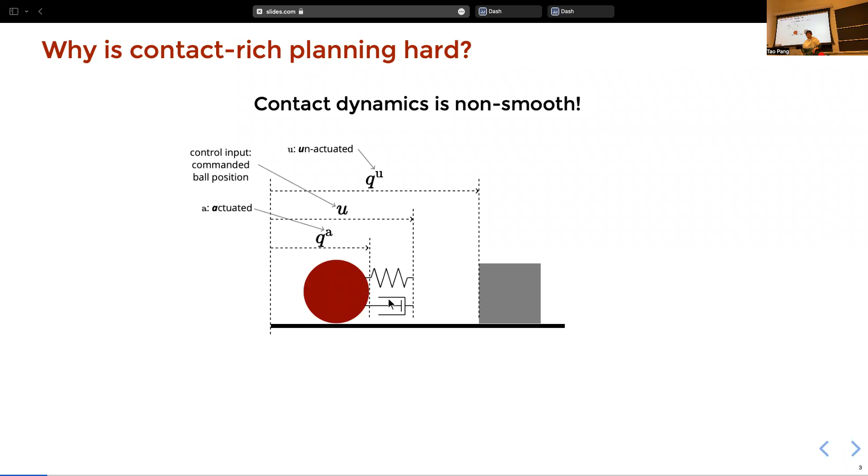So what does the plot of the dynamics look like? Here I have prepared a live hardware demo with a box and a ball. If you're not pushing the box and just moving the ball around, the box would not respond to the commanded position of the ball. The box would only respond when the ball is actually touching the box.

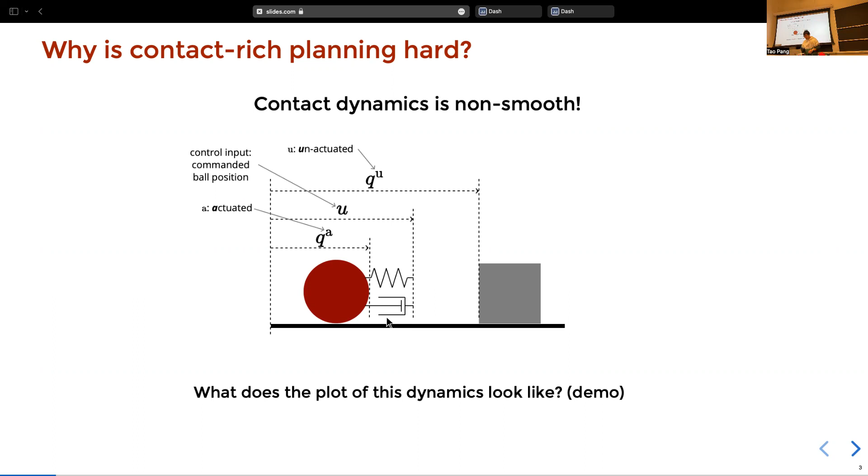Here I have a demo showing that in action. I'm plotting the position of the box against the commanded position of the ball. Before the ball makes contact with the box, it just stands still, and it only moves when contact is established. As we can see, the dynamics itself looks like a ReLU, which has a discontinuous gradient.

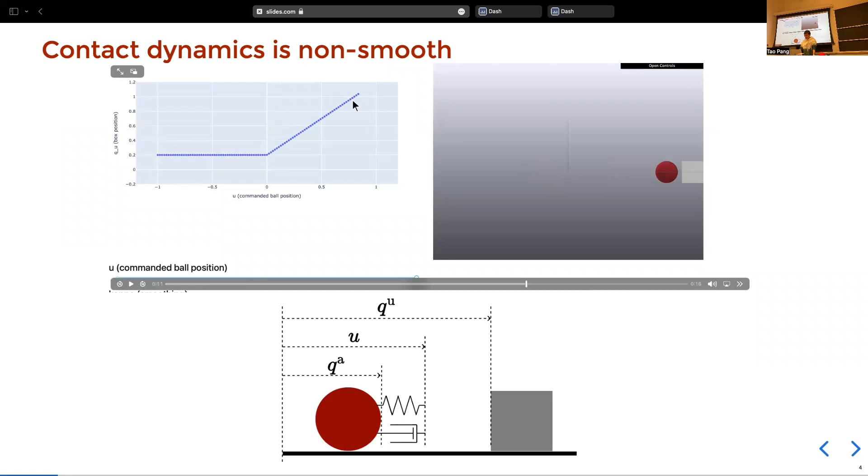And that's going to cause trouble when we try to accomplish certain tasks, such as we want to move the box to the right from where it currently is to q^u goal. We as humans know that we need to push on the box with the ball to move it, but to tell the computer to do it, we need to write it down in a way that it can understand. The most common way to do this is through a framework called optimal control, where we try to minimize the distance between the goal and where the box is after an action is taken.

The most common way to solve this optimization problem is with some local optimization methods, such as gradient descent, where we move in the opposite direction against the gradient of the objective function. So here, if I write down the gradient with the chain rule, you'll see that the derivative of the dynamics comes into play.

And if we use the exact gradient of the exact dynamics in this optimization, we would have a problem, because whenever the ball is not touching the box, which is mostly the case, we would have a gradient that's exactly 0, which tells us nothing about how we should move the ball in order to touch the box.

In fact, this has been a long-standing problem in robot motion planning that people have already come up with a nice solution to. That solution is smoothing. So we can imagine introducing a force field between the ball and the box so that the box can be touched by the ball before they even establish contact.

So this would give us a smoothed version of the originally non-smooth dynamics, which has non-zero gradient when there's no contact. As a result of this positive gradient, if we do gradient descent now, the gradient would indeed tell us to move the ball to the right in order to touch the box, and thereby moving the box to the right as well.

But what if we want to move the box to the left? If we again follow the gradient, it would simply tell us to move the ball to the left. And if the ball starts on the left of the box, it would simply keep moving left, without ever touching it.

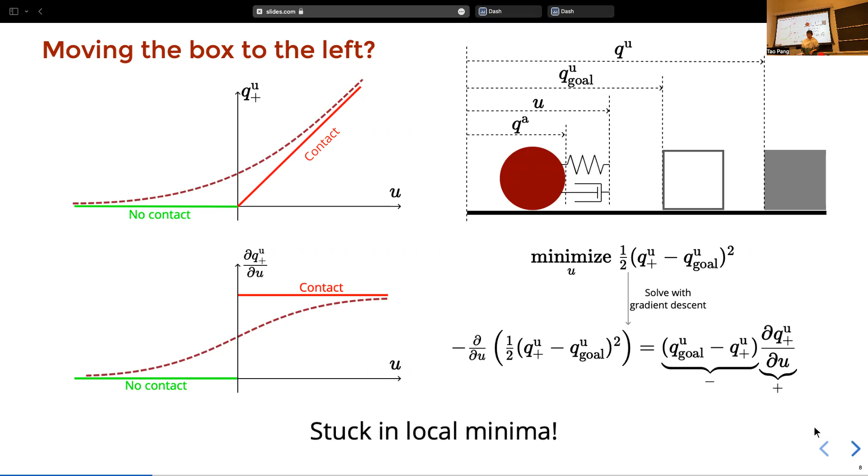That's problematic because it would never touch the box. This is a case where a local search algorithm gets stuck in local minima, which is fairly common in local search methods. We as humans know that we need to move the ball to the right of the box before moving it to the left again to touch it. But for local search methods, that kind of action usually increases the cost before starting to decrease it again, and as a result, it's usually not able to find actions like that.

So we need some mechanism to do a more global search, and usually the way to organize this search is through this thing called contact modes.

For the simple system, there are 4 contact modes: ball on the left not touching, ball on the left touching, ball on the right touching, and ball on the right not touching. The dynamics of the system in each of these modes is relatively simple, in this case linear, so we can just solve the optimal control problem for every one of these modes and pick the solution with the lowest cost.

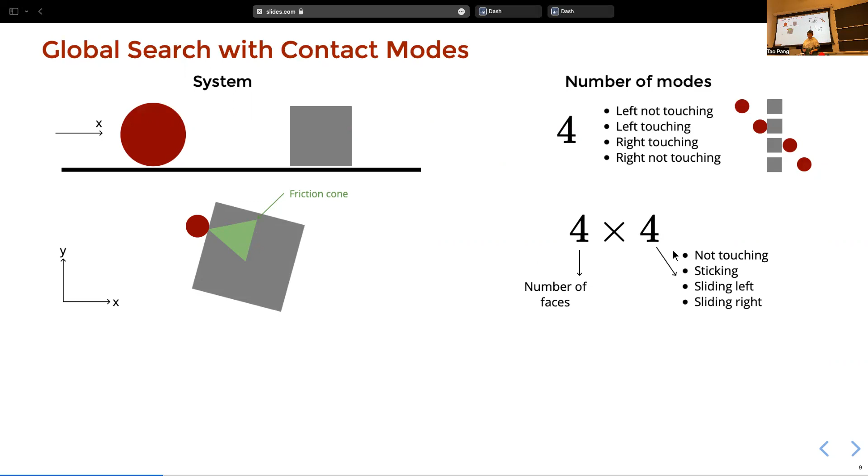But this method has a problem: the number of modes grows very quickly with the number of degrees of freedom or the complexity of the system in general. In this case, if we allow the box to rotate freely and move freely in the 2D plane, and consider friction between the box and the ball, we would have 16 modes. The ball can make contact with each face of the box, and for each face, it can be touching, not touching, sliding left, or sliding right.

And we get to something even more complex, such as dexterous hands, where we have a number that's absolutely astronomical—it's basically hopeless to think through how we would transition from one mode to another. I think this hints that we need a method that's fundamentally different from reasoning about mode transitions.

Okay, hopefully I've convinced you that for contact-rich planning to work on the scale of dexterous hands, we need both global planning and smooth dynamics.

So we will propose a method that takes the best from both worlds, where we combine global planning that is informed by a smooth version of the dynamics, the contact dynamics.

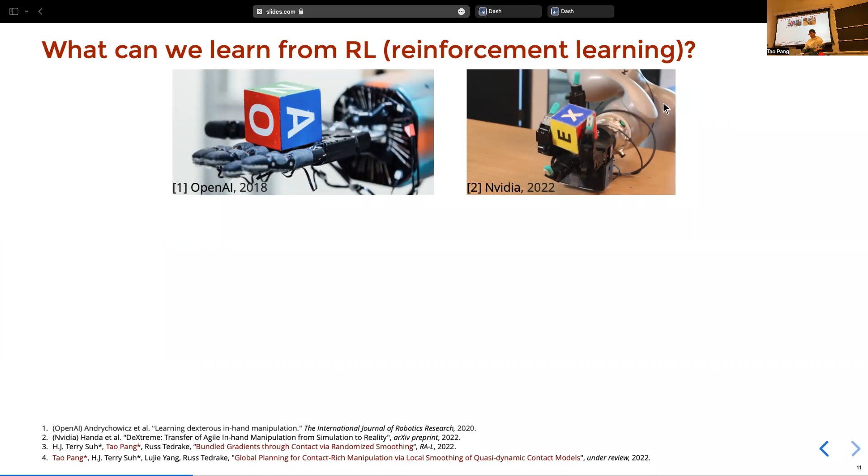A literature review would not be complete without talking about reinforcement learning. I think RL has produced some of the best and most convincing hardware demos with dexterous manipulation, but the way it's done right now leaves a lot to be desired. For example, it requires a heavy amount of offline computation—in the NVIDIA case, it took 60 hours on their beefy machine to get the policy. And after you get this policy, it's very difficult to generalize it to different tasks. For example, the same policy used to rotate the cube cannot really be used to open a door.

Nevertheless, it's undeniable that RL has solved a very difficult problem that model-based methods have been struggling with, and we would really like to understand how it does it. My co-author Terry has thought a lot about this problem. Our hypothesis is that in RL's effort to avoid local minimum, it does a lot of sampling that has a smoothing effect on the dynamics. Therefore, if we could do smoothing without sampling, we may be able to achieve the same level of performance as RL without incurring the computational cost of RL.

Before talking more about the technical details of our planner, let me show you what it can do. All these plans are generated by our planner. This is showing a visualization of the plan using the quasi-static dynamics, which I have yet to introduce.

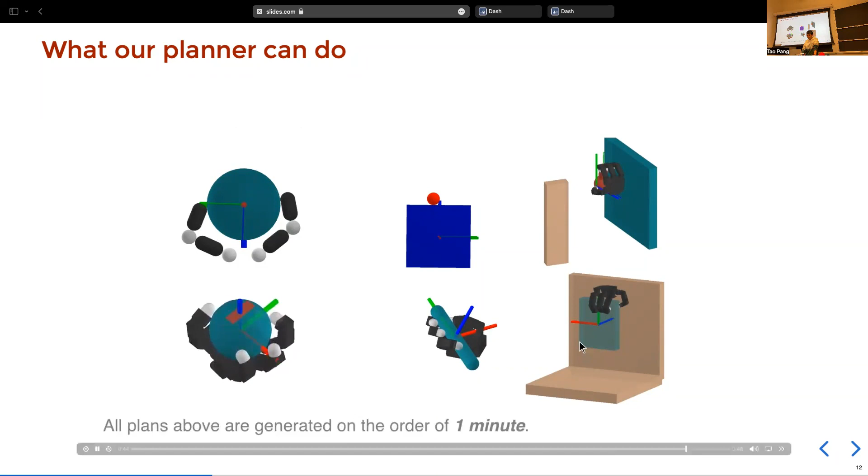This is box pushing, and this is something more complex. We have a dexterous hand opening a door, a dexterous hand picking up a book, a dexterous hand trying to align a pen with the target frame, and finally a dexterous hand rotating a box in hand. A ball in hand. Okay, it's going to take a while. One thing to note here is that there's a lot of repositioning of the fingers to get a better grasp on the object in order to keep rotating it.

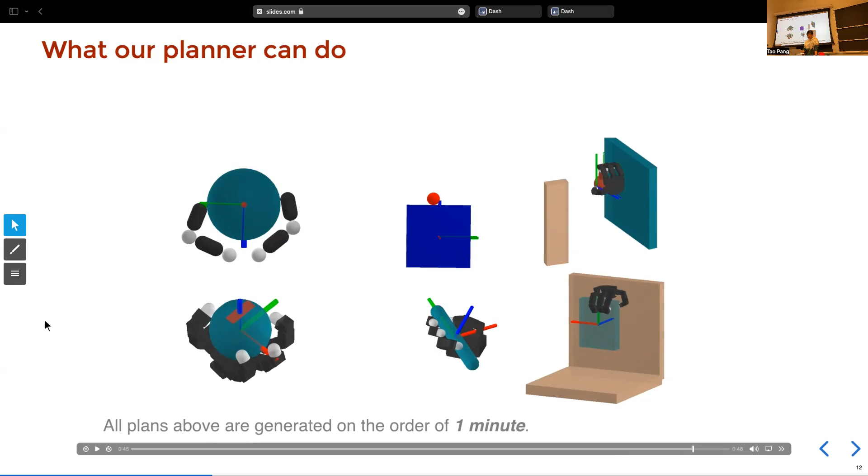All of these plans are generated on a laptop with about 1 minute of online compute. Here we are showing that the plans generated are indeed contact rich. The colors indicate the contact forces between the hand and the object, and as you can see, a lot of the different parts of the hand are activated during the execution of the plan.

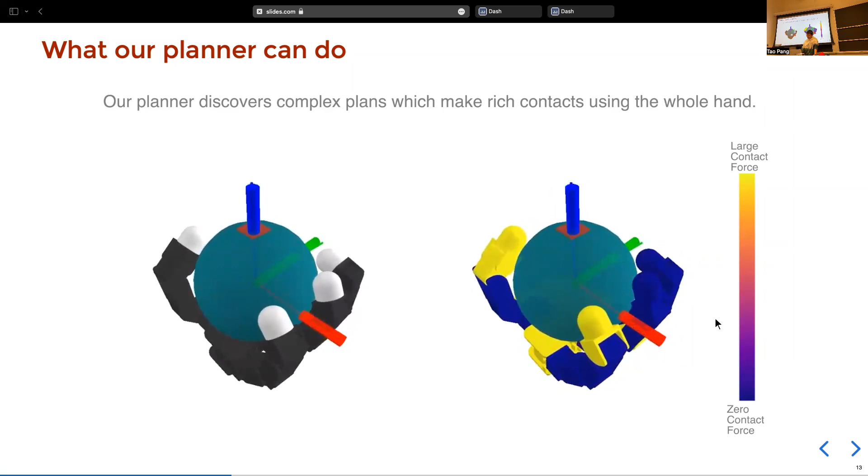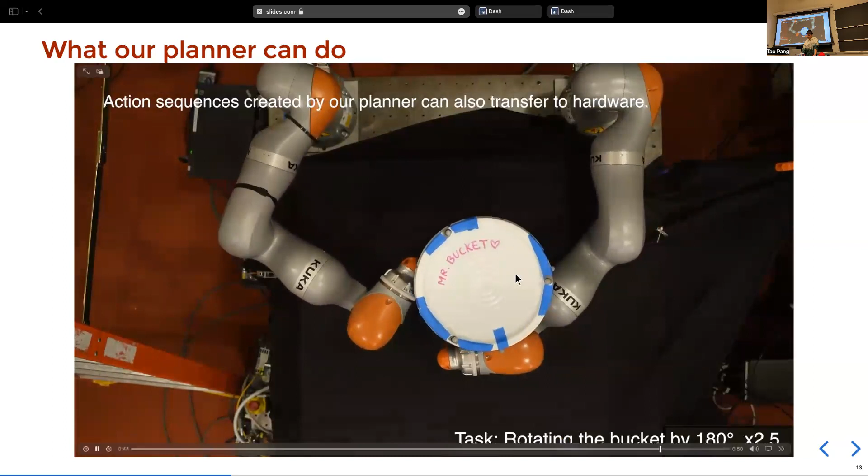This also works on hardware as well. Here we are trying to rotate the bucket by 180 degrees. Here's the action that we are particularly fond of, where the bucket starts off on the hand of the arm and rolls onto a hook that's formed by the arm. It's showing that the bucket is indeed rotated by 180 degrees.

Summary of our contributions: we proposed a contact-rich planner that can generate plans for complex systems involving dexterous hands, and on hardware, with just about 1 minute of online compute on a laptop. In contrast, RL-based methods need tens of hours of offline compute on a beefy workstation to get a functional policy. Our planner is enabled by a novel contact dynamics model which is quasi-static, convex, differentiable, and amenable to smoothing, which we have argued is essential to the success of contact-rich planning. With the help of this model, we proposed a sampling-based global search algorithm that's guided by this model.

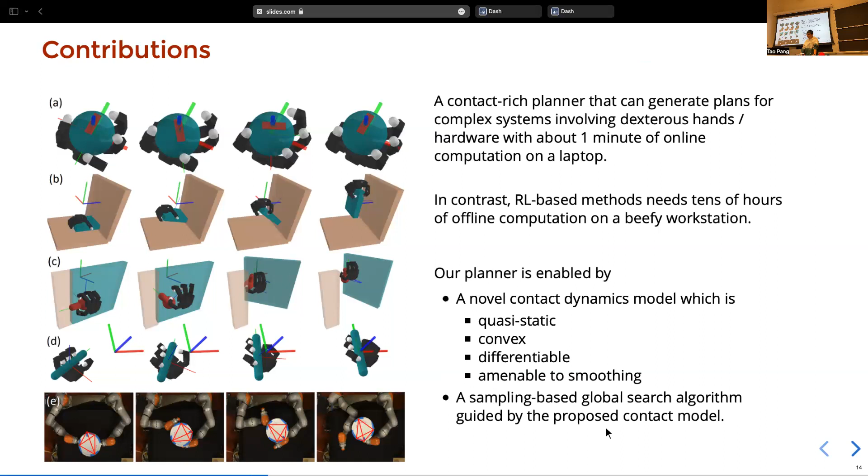First off, I'll talk a little bit about how the contact model works. There will be some equations in this section. I'll get over it very soon.

So first off, what do we mean by the dynamics being quasi-static? By dynamics, we mean a discrete time version of the dynamics that tells you where the object is at the next time step from the current object configuration and the action. By the system being quasi-static, we mean the velocity is so small that the inertial forces and Coriolis forces can be ignored during the entire process. As a result, velocity is not part of the state - we only have configuration, hence Q instead of X in the dynamics.

As I showed in the simple ball and box example, we divide the system configuration into an actuated part corresponding to the robot and an unactuated part corresponding to the objects. We use U again to denote the commanded position of the robot, which is usually impedance controlled with some stiffness - damping disappears here because everything is quasi-static. We also use delta Q from time to time to denote the difference between the next configuration and the current configuration, and we'll use H to denote the step size. So it may come up from time to time as well.

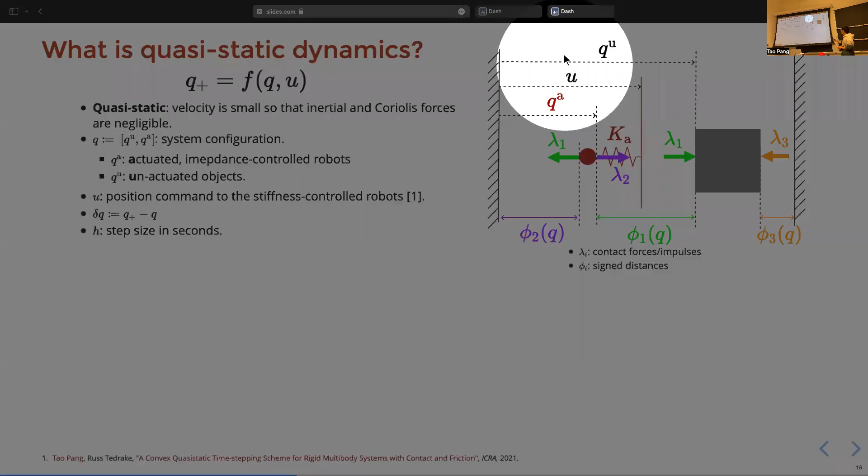To model contact, we need contact forces, denoted by lambdas, and distances between different contact pairs, denoted by phis. Here we have three contact pairs: one between the object and the robot, one between the robot and the wall, and one between the object and the wall.

These variables need to satisfy the constraints of physics. The robot needs to stay in force balance, and so does the object. And there cannot be any penetration between any of the objects and the walls. So for any contact pair indexed by i, there cannot be any penetration.

Contact forces can only push on objects, they cannot pull objects towards you. And last but not least, you can only push on objects when you're in contact. This is a classic set of constraints to model contacts.

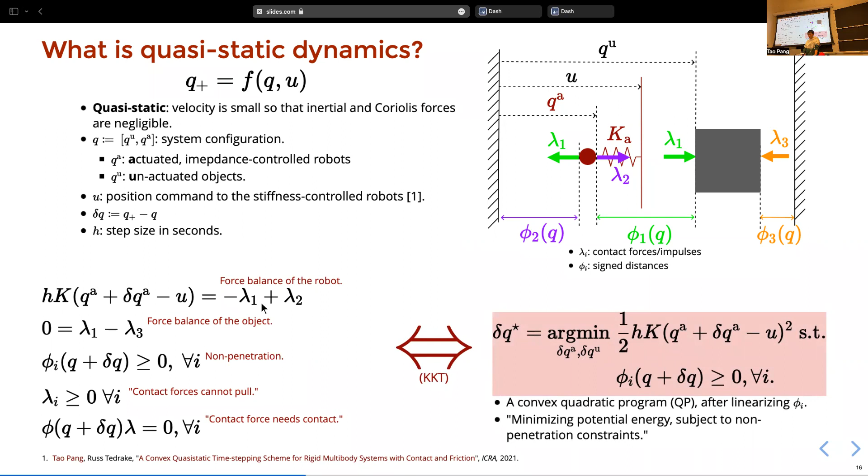It turns out that this set of constraints is equivalent to the optimality condition of a quadratic program. So if you solve this to optimality, it's equivalent to satisfying this set of constraints. After solving, you simply add the solution to the current configuration to get the next configuration.

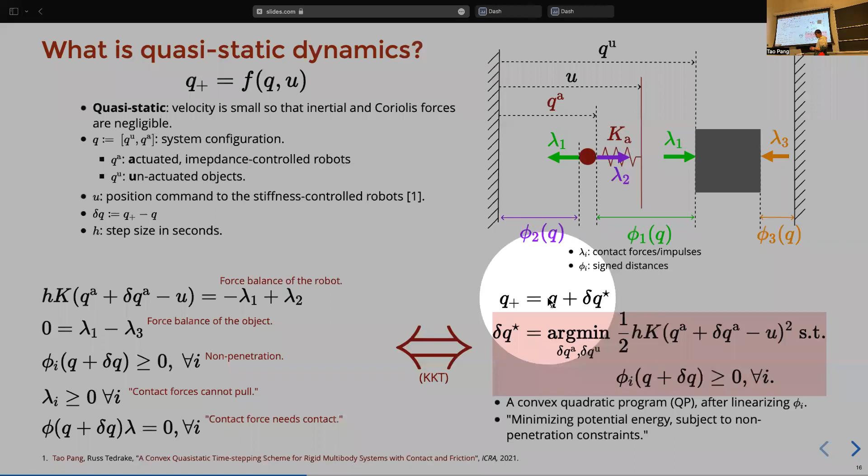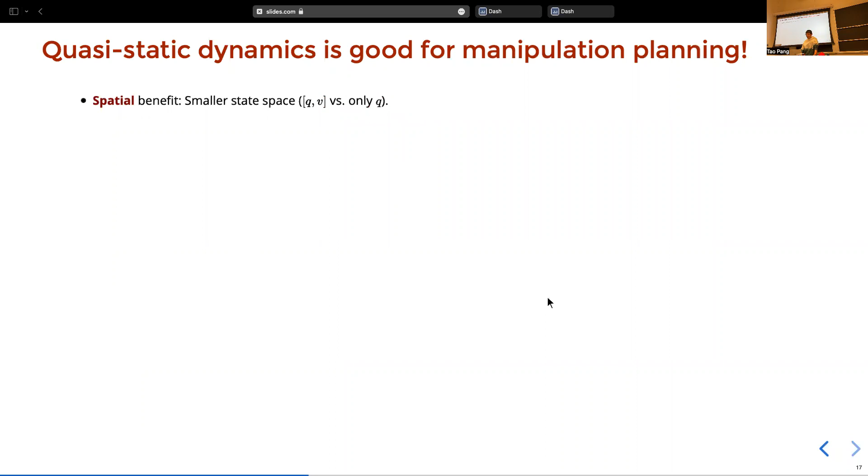So why do we care about quasi-static dynamics? First off, we only need to deal with a state space that's half as large as a second order system, because we throw away V and only deal with Q.

But an often overlooked benefit of quasi-static dynamics is on the temporal side of things, where by ignoring the transients introduced by spring dampers, we can look ahead a lot further by taking fewer steps.

Here I'm showing this extremely simple second order system with mass, spring, and damper. If you were to model second order dynamics, you would have to take many steps before reaching the equilibrium. But with the quasi-static version of the dynamics, you reach the equilibrium in one step.

Usually this can save you some amount of compute when formulating the planning problem. Also, many manipulation tasks are indeed quasi-static. They are dominated by friction and contact forces instead of the Coriolis forces and inertia forces.

This is a very good example of what a quasi-static system is. Whenever I push something, it moves, and when I'm not pushing it, it doesn't move. That's the operational definition of what quasi-static can mean.

But the formulation we just brought up on the previous slide needs a little bit more thought. Here you can see that the objective function is only positive semi-definite, because there is no cost on the delta Q U terms.

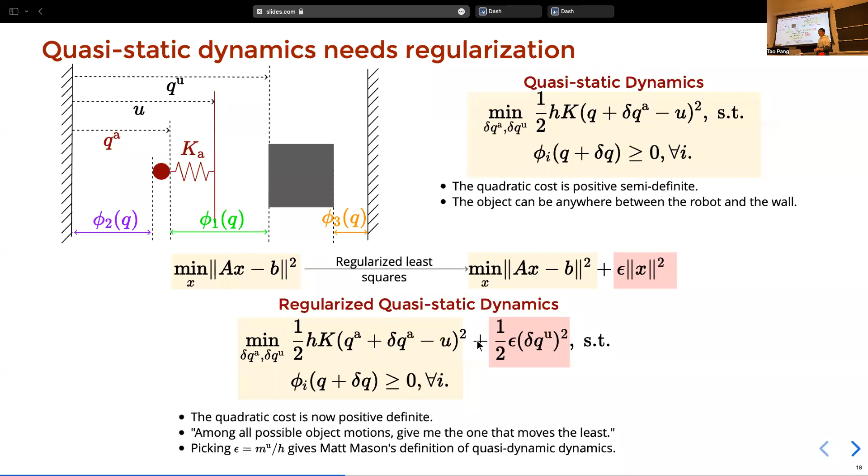If we pick this regularization constant equal to the mass divided by the step size, this gives you Matt Mason's classical definition of quasi-dynamic systems. But in general, we can pick the regularization in a way that reflects how heavy or how much resistance the robot faces when pushing the object.

So far we've been talking about simple systems, and we've shown that they can be formulated as a convex program. But for more general frictionless systems with many contacts and many states, the dynamics is still a convex program, although it looks a little bit bigger.

You don't have to worry about the details of the terms in the equation. I just want to show the quadratic form that appears in the objective, and the linear constraints that are in the cost.

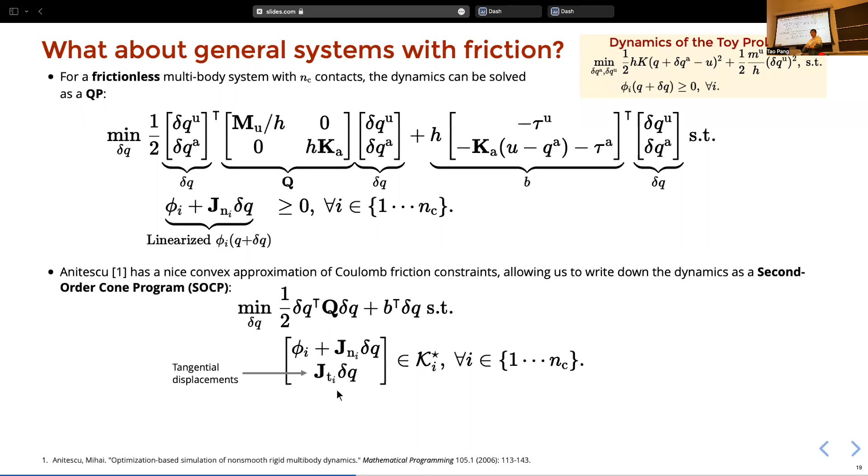If we want to model friction, it turns out that Anitescu has proposed a nice relaxation, or convex approximation, of the Coulomb friction constraints, so that instead of inequality constraints, you have cone constraints that are still convex. This allows you to solve for general systems with contact and friction.

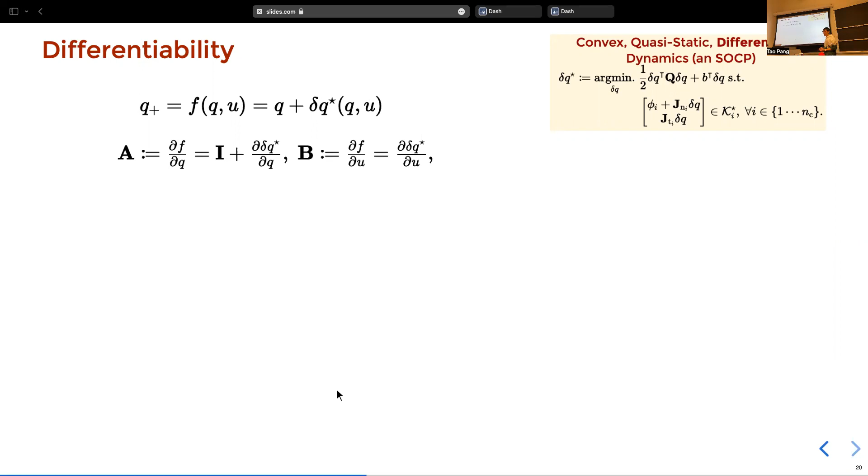Okay, since the problem itself is convex, we can make use of existing techniques that differentiate through convex programs to get the gradient of the next system configuration with respect to the current configuration and the action. The standard way to do it is by applying the implicit function theorem to the active constraints at optimality. And many differentiable simulators indeed take this approach.

The thing to note here is that what you get from this differentiation is the gradient of the non-smooth dynamics. Remember the ReLU that I showed earlier? If you do this, it would give you either 0 or 1. But with the gradient computed from differentiable simulators, we can smooth them using first-order randomized smoothing.

But randomized smoothing requires sampling. And for systems with contact, there is a more efficient way to do the smoothing, which we call analytic smoothing.

We have shown that for this system, this is the same system with 3 contacts. We can formulate the dynamics as a QP here, which is equivalent to a set of KKT conditions that describes the physics of the system.

And it turns out that we can also do an unconstrained version of the same QP, where we shovel the constraints into the cost with an indicator function that is 0 when the constraints are satisfied and goes up to infinity when the constraints are violated.

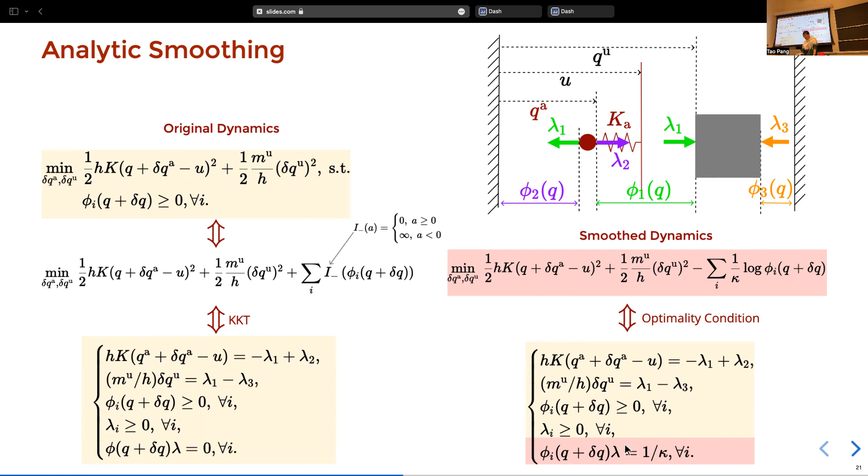For general systems, the thought process is still the same. The only difference is that instead of having a log for the inequality constraints, we now have a generalized log for the cones. The resulting optimization program just looks longer, but it's still the same: it's unconstrained, it's convex, it can be solved with interior point methods, it is differentiable, and it will provide us with smoothed gradients, which we can use to do contact-rich planning.

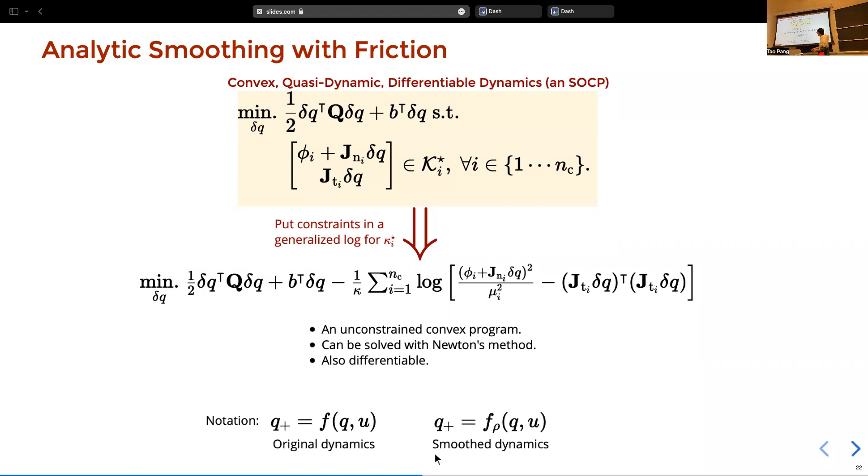From here onwards, I'll use the subscript rho to denote the dynamics that's smoothed. Now we are ready to move on to talk about global sampling-based contact-rich planning using this quasi-dynamic model.

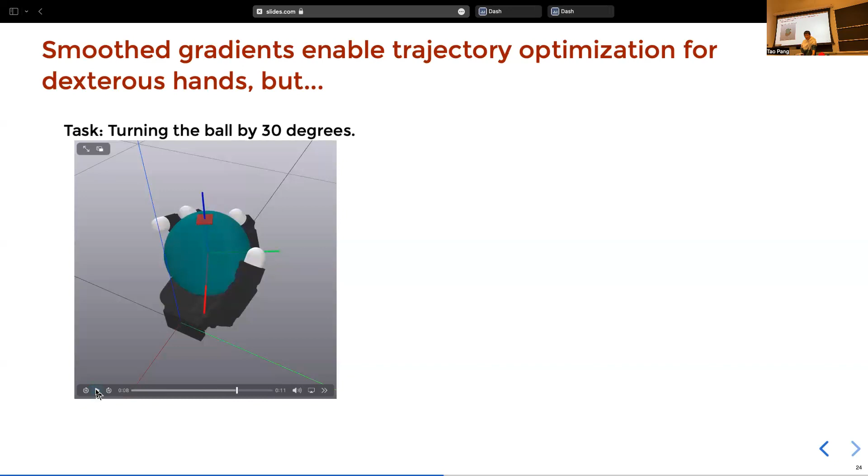As I mentioned earlier, local search methods can give pretty good results when there's no local minima to avoid. In this case, we can rotate the ball with the hand by 30 degrees just fine, using just gradient descent with the gradient computed from the quasi-dynamic dynamics. But what if we want to rotate it by 180 degrees?

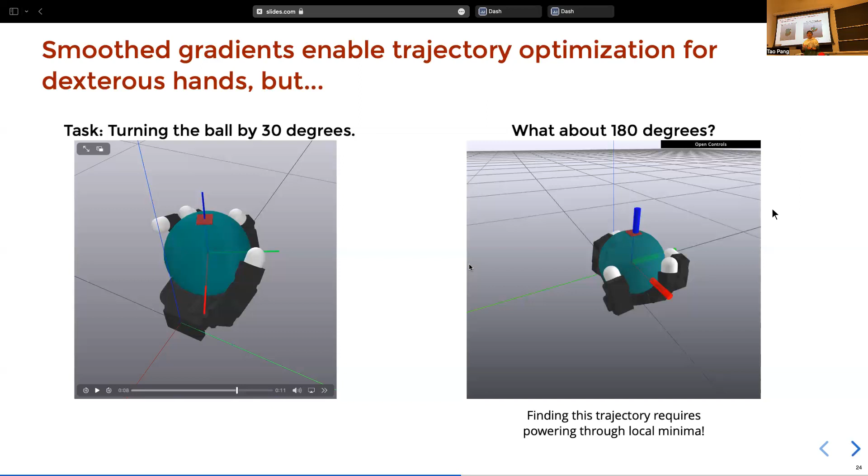You can see that in this process, the hand reconfigures itself to get better grasps on the object from time to time in order to keep rotating the ball. And this kind of reconfiguration usually incurs some cost on the control action. That means cost will go up before it can start to go down again. And this is very adversarial for local search methods that always try to go downhill on the cost.

As a result of that, we need something that looks more globally for a solution, and sampling-based motion planning has been known to be very good at this global exploration.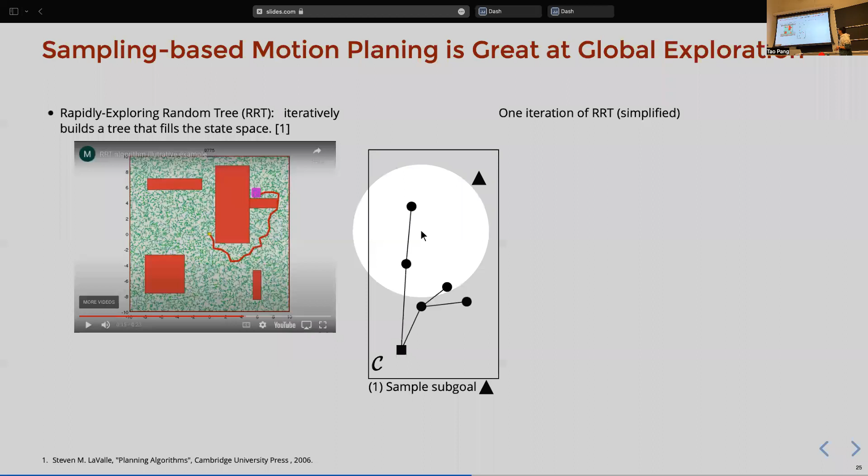At a typical iteration, we would sample a subgoal from the configuration space, then compute the distance from every node in the tree to the subgoal, and pick the one closest to grow the tree from. Since the subgoal itself is collision-free, we can simply add it to the tree. But there is a problem when there are dynamics constraints on the system.

In this simple example of the car, it's very easy for the car to move forward, but almost impossible to move it sideways. So although these two configurations are the same distance to where the car currently is according to the global Euclidean metric, their dynamic reachability implies that their actual distance needs to be vastly different.

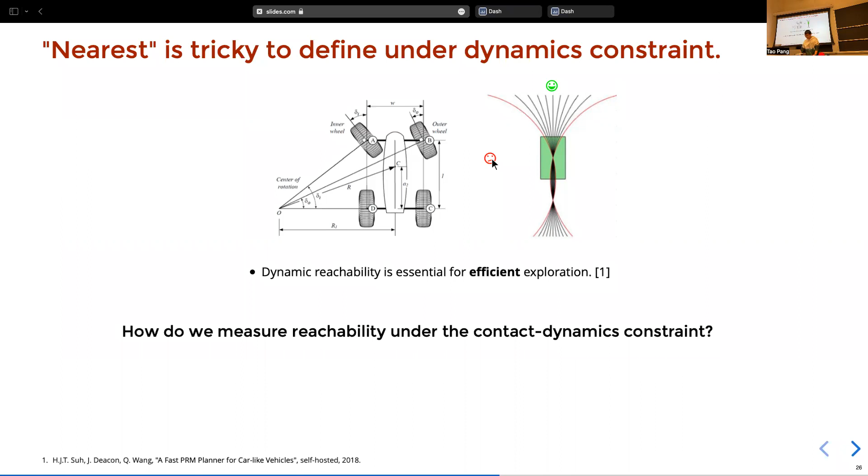Therefore, we need to answer the question: how do we measure dynamic reachability under the contact dynamics constraint? Our solution is a distance metric based on the smooth linearization of the contact dynamics, the quasi-static contact dynamics. Recall that we've shown we can smooth the contact dynamics, and this subscript rho denotes that the thing has been smoothed.

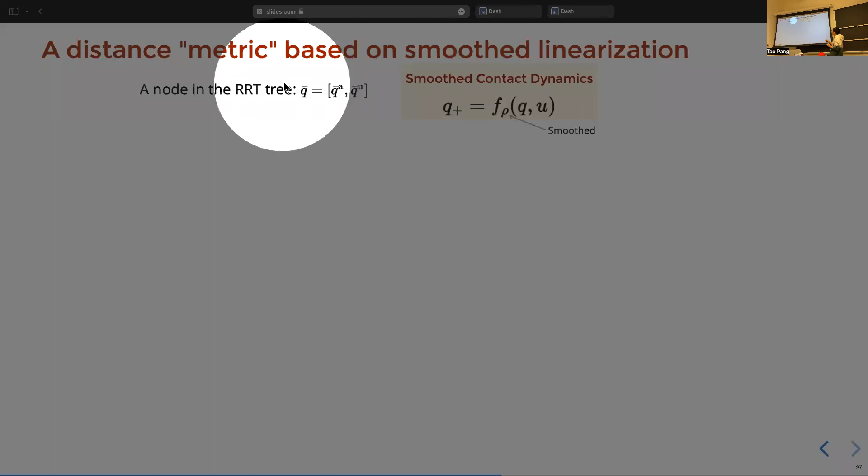Our goal is to compute a distance metric for a node that's currently in the tree, denoted by the bar. We use what we call a smooth input linearization, which tells us where the system can get to with a small perturbation from the nominal robot configuration. Since we're mostly concerned with moving the object from one configuration to another, we can just take the rows of the first equation corresponding to the object.

Then we can define our distance metric, which looks like an ellipsoid, where the shape of the ellipsoid is defined by B B transpose, and the center is defined by just the evaluation of the function value from the nominal configuration.

The epsilon sub-level set of this distance metric is indeed an ellipsoid. A different way to look at this is that we take a unit ball in the action space and transform it through the B matrix into the space of object configuration. There are certain directions in which the ball is elongated - those are directions that are easy to reach. And certain directions which are contracted - those are directions that are harder to reach.

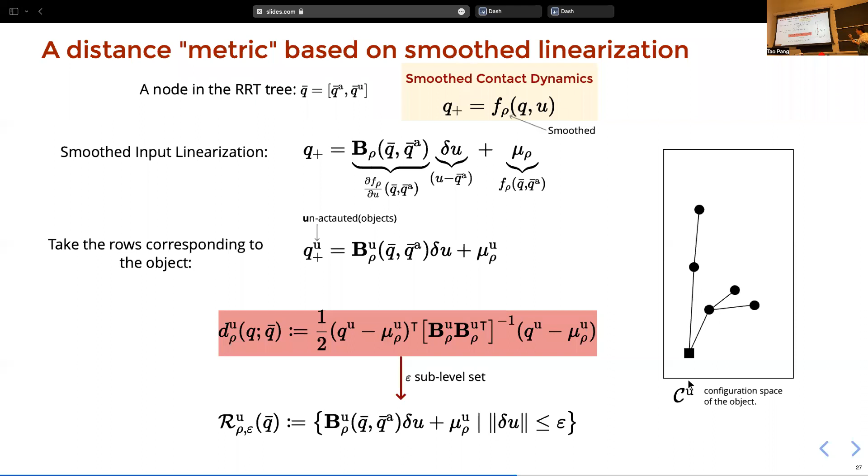We also propose a slightly different way to visualize the new tree where each node has a distance metric. Now, instead of drawing the box as the entire configuration space, we only draw the box as the configuration space of the objects. For every node, because there's also the configuration of the robot, we can compute the distance metric for each individual node.

Now I'm ready to show what it looks like. Let me first explain what's on the screen. On the right is the visualization of the ball and planar hand system, and on the left is the tree in the object configuration space that I just described. The horizontal axis is the translational degrees of freedom of the ball, and the vertical axis is the rotational degrees of freedom of the ball.

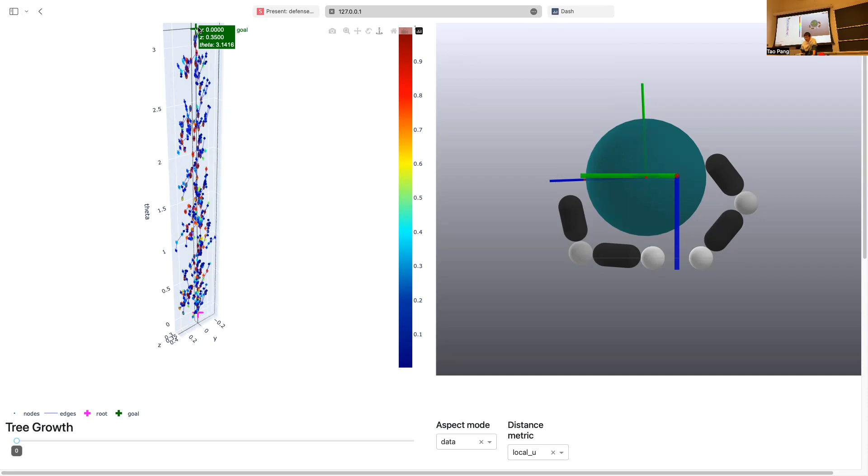The goal here is to rotate the ball by 180 degrees, so as you can see, the root starts at angle equals 0, and the goal is up here with theta equals pi. I can hover on these nodes, which will draw the configuration of the system on the right.

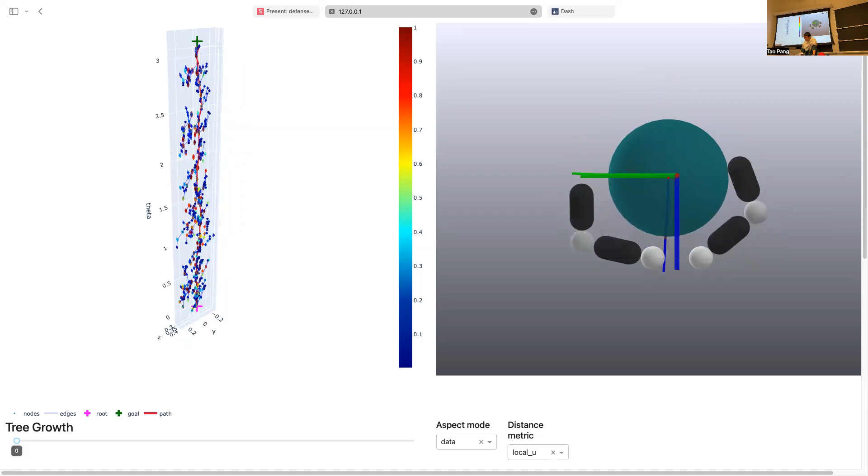Let me first show you what a path looks like. I can show a path to any of the nodes by just clicking on it. Let me replay it. Yeah, that looks pretty convincing.

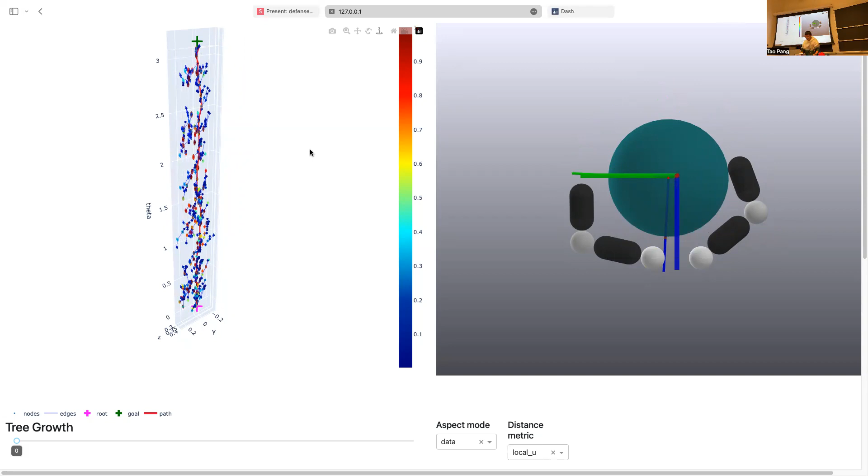This kind of tree is what you want when you're a motion planner trying to grow a tree that fills up the configuration space - it uniformly explores all directions and fills it up nicely. If we zoom in, we'll see that each node has its own ellipsoid, which is its distance metric. The color of the ellipsoids denotes their volume - a redder one means it has a larger volume, and a blue one means it has a smaller volume.

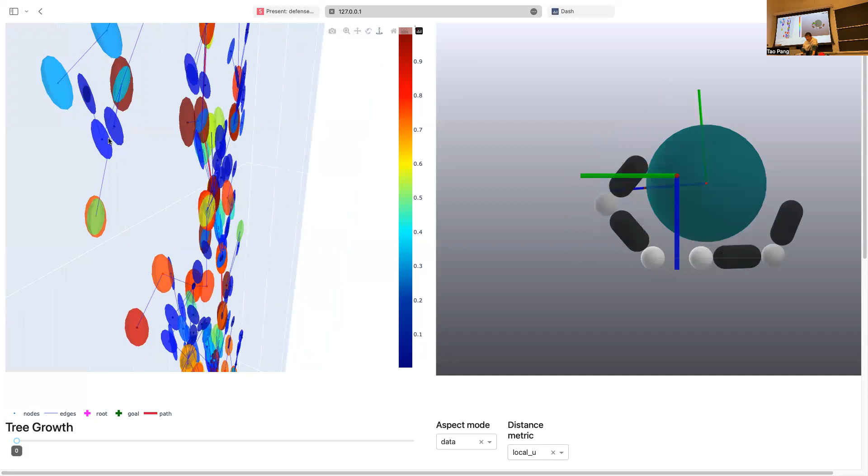If we rotate around, we can see that these blue ones are almost flat in certain directions, which means they will be considered as far away from almost any other configuration. If we look at what these configurations with bad distance metric look like, they usually correspond to configurations where the robot is not really touching the object. In contrast, where the distance metric is good, is red, we almost see a good grasp with the robot on the object. These blue ones usually do not correspond to configurations with contact.

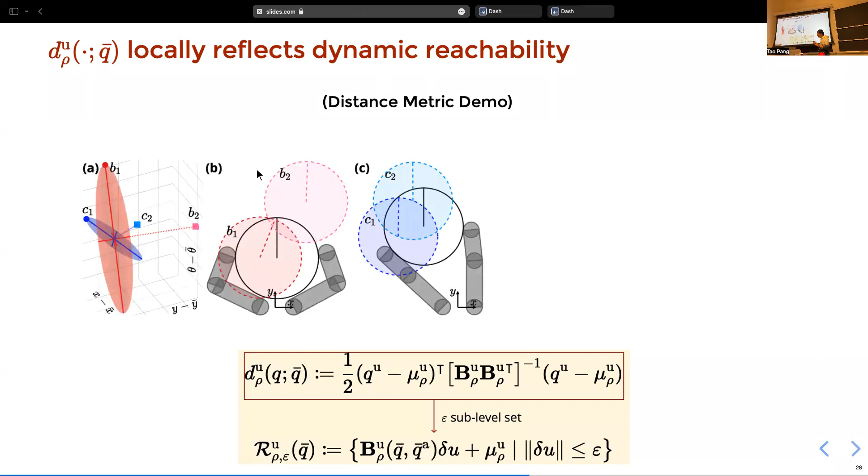Just to reiterate what I showed in the demo with nicer graphics: for this configuration, the nominal configuration is shown in black, and the distance metric is shown here as the red ellipsoid. B1 and B2 are two configurations that are equidistant to the nominal configuration according to the global Euclidean metric, but B1 is apparently a lot closer than B2 according to the local metric. As shown here, it is intuitively clear that it's a lot easier to move the ball to the red configuration than to the pink configuration.

Another thing I mentioned is that usually good distance metrics correspond to configurations with contact. Here, as I move the robot further and further away, you can see that the distance metric shrinks from a large, nice ellipsoid to something that's almost invisible. So there's a little bit of blue in the center, corresponding to the blue configuration of the robot.

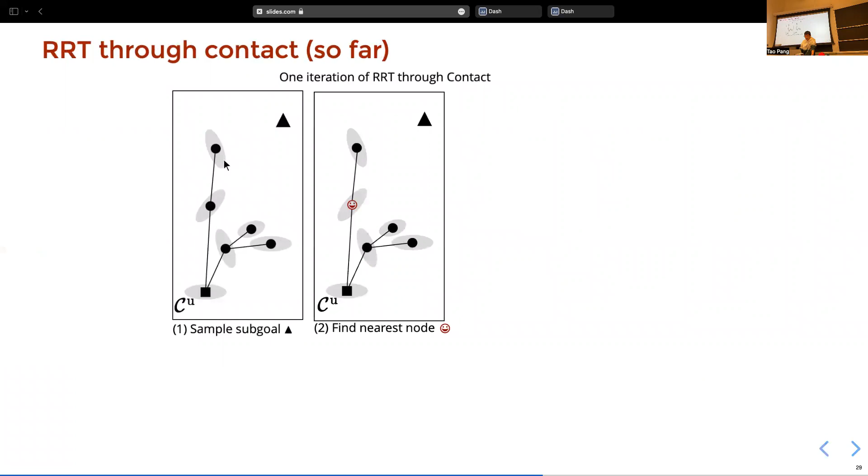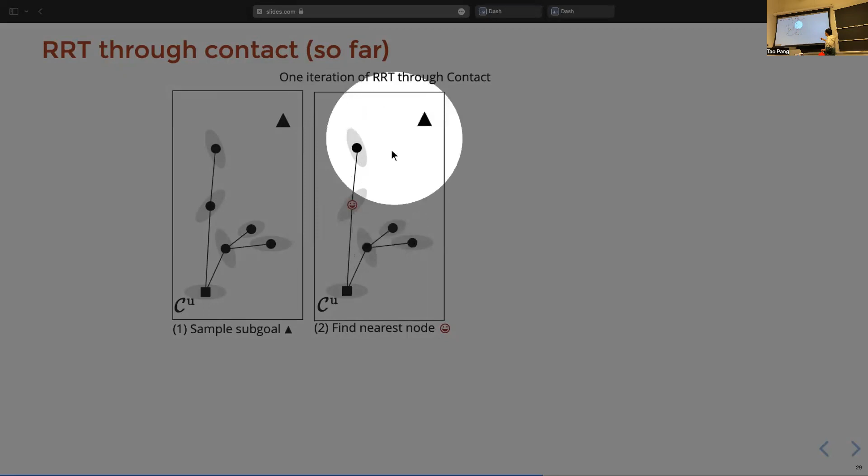So far we have shown that with the help of the distance metric, we can better tell the distance from the subgoal to the tree. If we were to use the global metric, this would be the closest node, but because we have individual metrics for individual nodes, this is now closest to the subgoal. After picking the closest nodes from the tree, we will compute a small action that takes us a bit closer towards the subgoal.

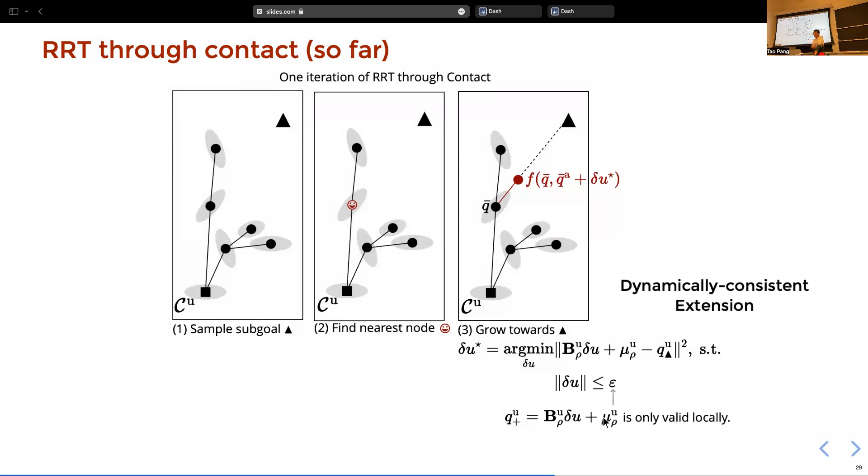We compute this action by solving a small optimal control problem that uses the smooth linearization of the dynamics, and here we only take small steps because we know that the smooth linearization is only valid locally. We call this dynamically consistent extension, which means the rollout here is consistent with the non-smooth version of the dynamics.

But there's a catch here. If we were to do this, we would only be making small changes to the robot configuration. As I said on the bottom, this is against the very spirit of RRT, which requires us to sample uniformly in the configuration space of both the object and the robot.

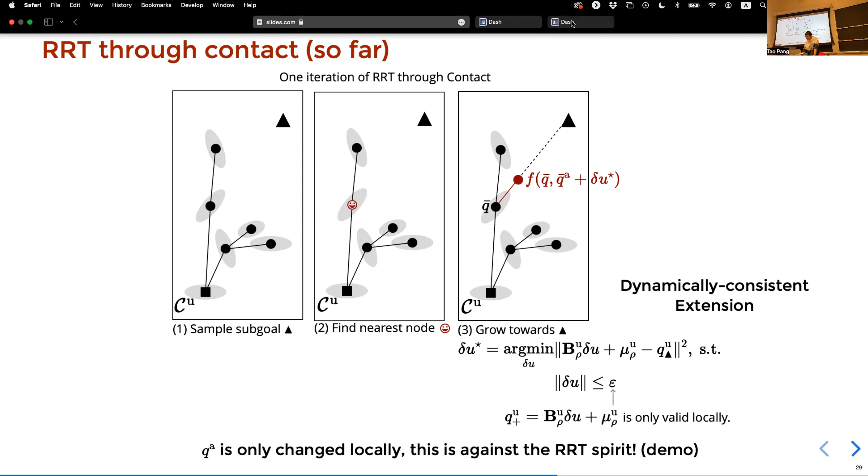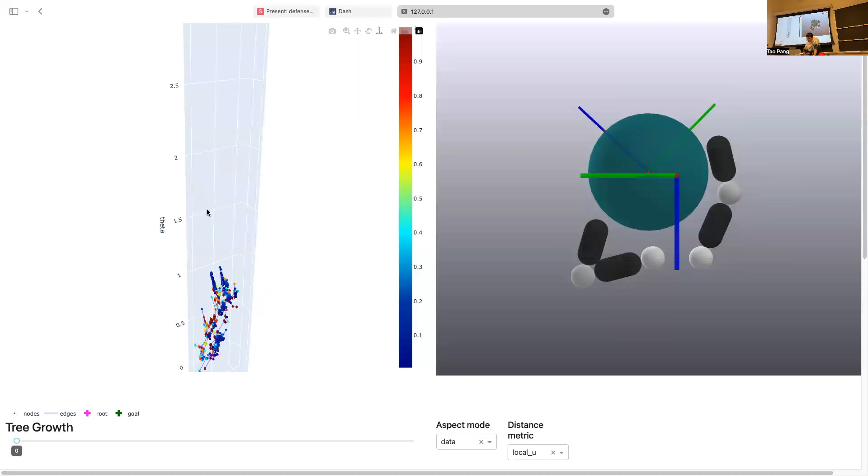The consequence of doing only this: I have a different tree. This tree has the same number of nodes as the one here, but you can see that it tries, yet it falls short of reaching the goal by a wide margin.

If we were to look at this tree, I'm going to hover on it and slide over the tree for you to see what it looks like. The robot configuration changes by a small amount from node to node. This is the exact reason why it's stuck, because we are not looking at the different ways in which robots can be interacting with the object.

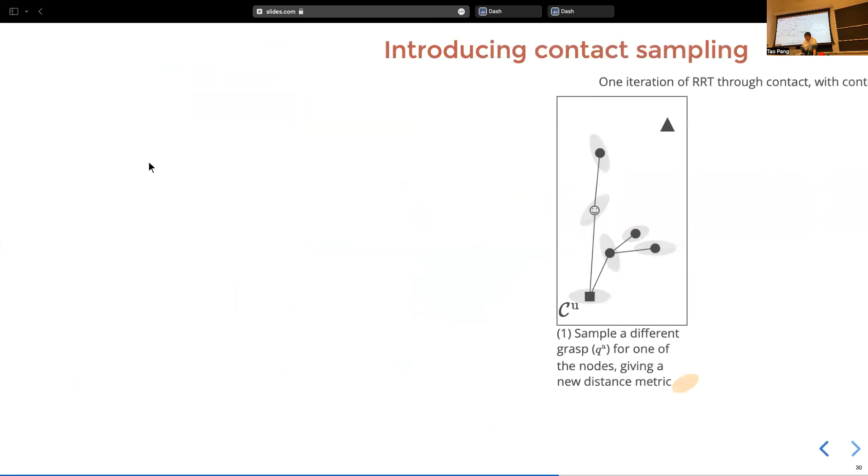To solve that problem, we introduce a new trick called contact sampling, where instead of trying to connect to the subgoal at every iteration, we pick one of the nodes from the tree and try to find a different way for the robot to grasp the object. That will give us, for this node that we picked, a new distance metric. So now with the new distance metric, this is the closest node to the subgoal, and we can make the connection from there.

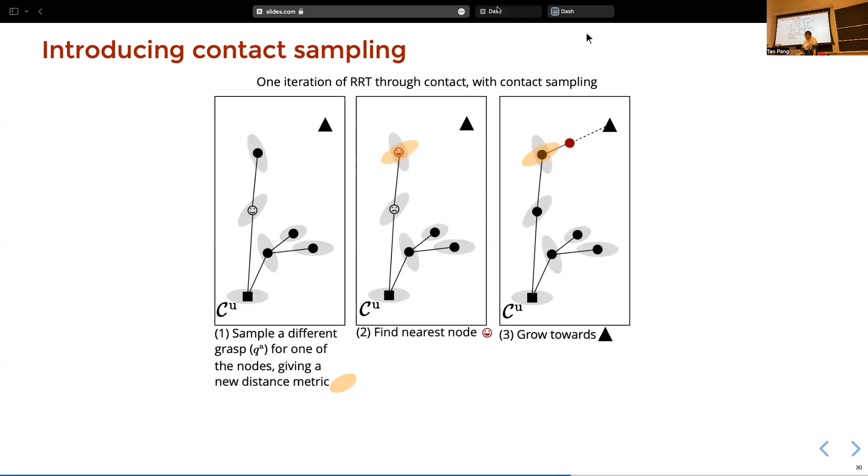You might have noticed that in the demo I showed earlier, there are nodes, object configurations, with multiple ellipsoids. This is exactly what happens when you do contact sampling. I can hover my mouse: for this object configuration, this ellipsoid corresponds to one way to grasp it, and this is another way to grasp it. The same is true for many of the other nodes.

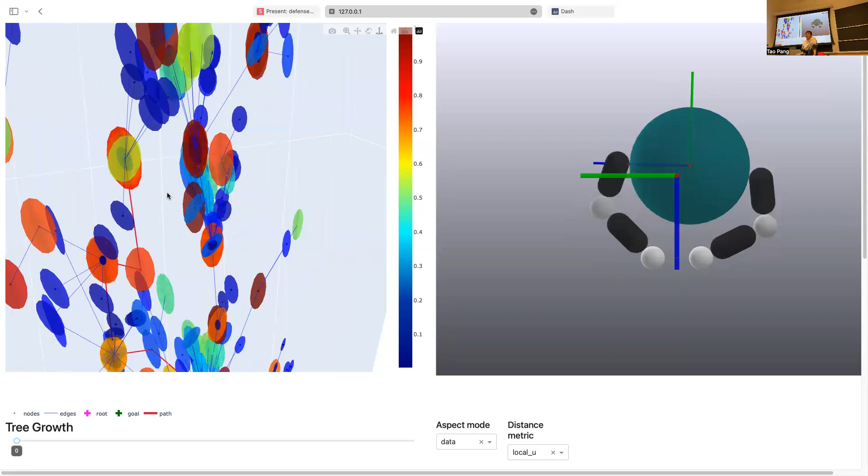A quick question on that example: what's the difference between one configuration where the 4 links are in contact versus the other one where only 2 links are in contact? Or was it more subtle than that?

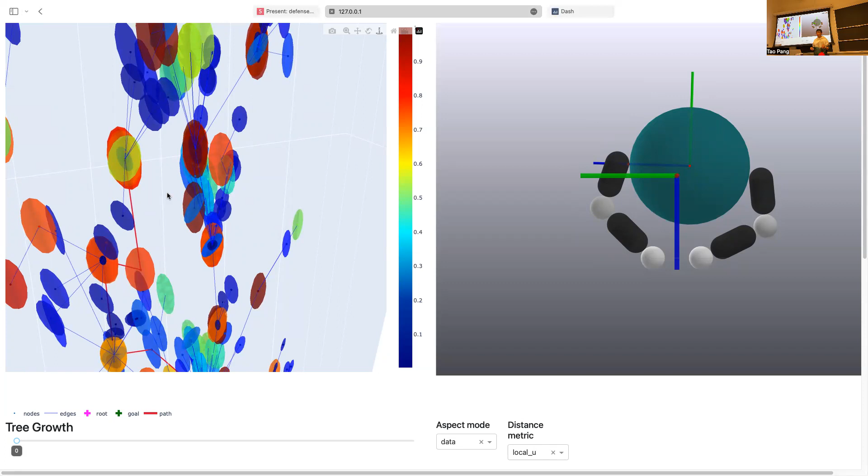No, it's not more subtle than that. We just have 2 ways to sample contacts: one is for the robot to hug the object, and the other is to grasp it with the end effector.

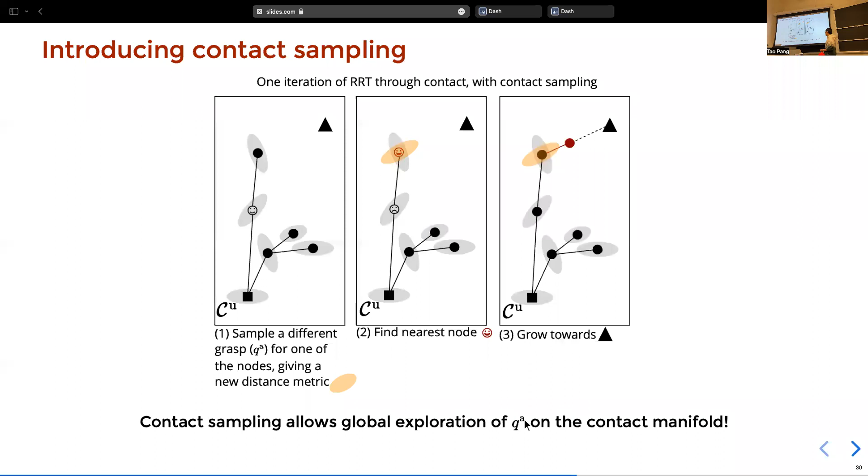Okay, with this trick we are now able to explore globally the configuration space of both the robot and the object.

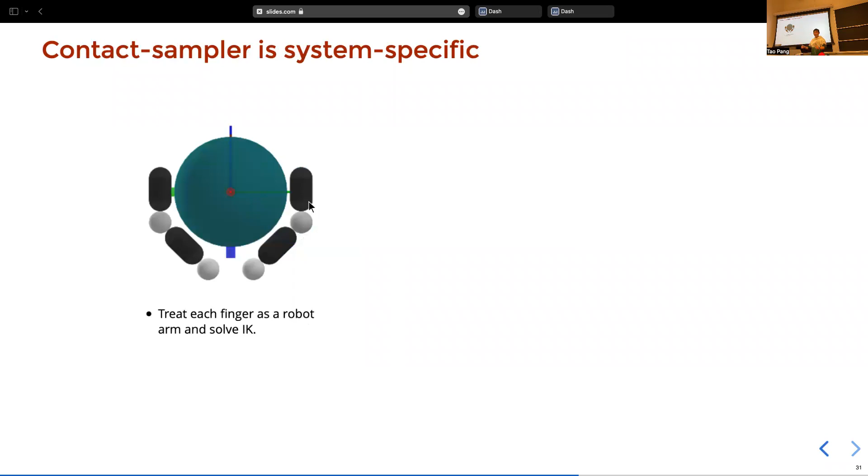Just a quick note on how we implemented the contact sampler. It is system specific. As I said in my answer to Alberto's question, for the planar hand system, we can either solve IK for individual hands or fingers, or try to hug the object. For the dexterous hand, what we did was sample a random direction in the configuration space of the hand, and then try to close the hand until it touches the object. This can be improved vastly with better techniques, but the important thing is that we need contact sampling to achieve good exploration.

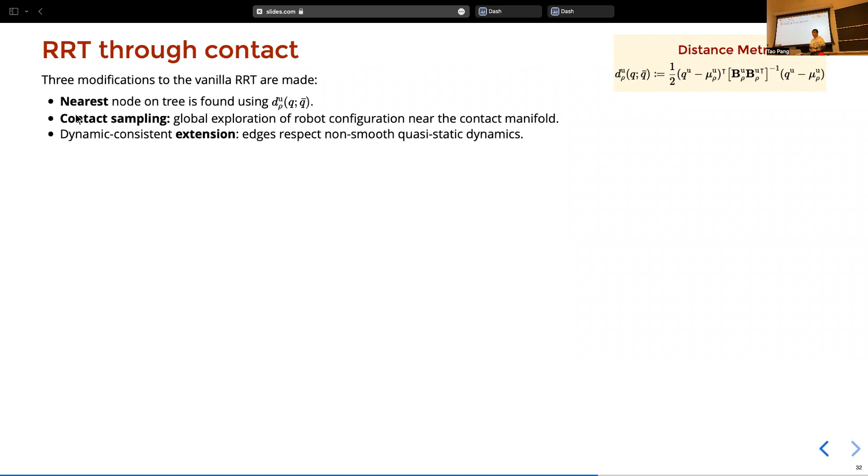Here's a summary of the modifications to RRT that we proposed to make contact-rich planning work. First is a distance metric that tells you the nearest node according to reachability. Second is contact sampling, which allows global exploration of the configuration space of both the object and the robot. And the last is dynamic consistent extension, which makes sure that the path we get from RRT satisfies the quasi-static dynamics.

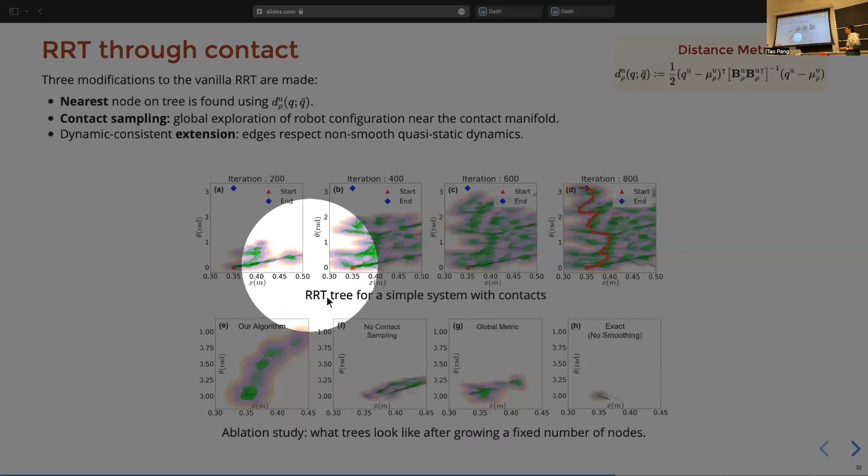Here's just a reiteration of what I showed with the demo, with a system I can plot on the plane. In the first row is what you get with an RRT that has all three modifications. As you can see, we can grow a tree that fills up the space nicely and finds a path to the goal. The second row is an ablation study where we remove one of these components and compare the shape of the tree. As you can see, without any of these, we get a tree that's stuck locally close to where it started.

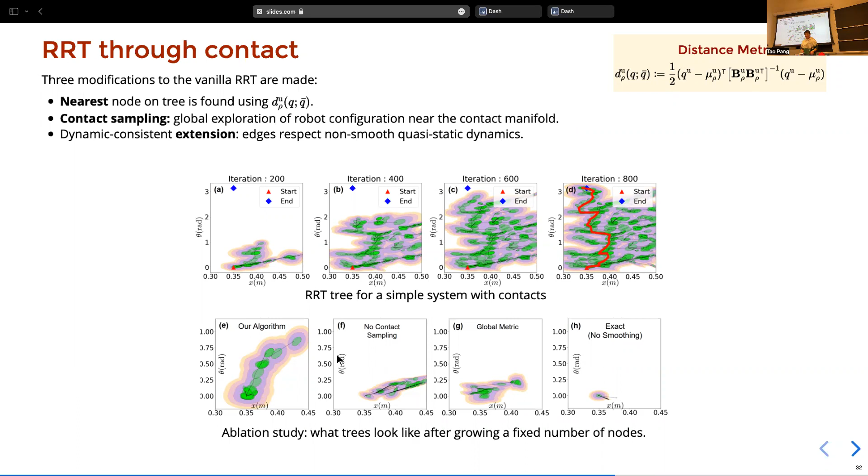All right, so next I'll talk about how these actually transfer to— oh sure, sure.

Have you seen anything where you might have a large radius of something that could have a large delta based on where you're going, that would maybe trick this into doing something a little more chaotic? Does that make sense? Wait, by having a large radius, you mean the node is considered close to every other node? If you have an ellipsoid with an extremely large radius, then every other node will try to connect to it. I haven't really seen that, but if that is indeed the case, then the planning problem should be relatively simple. So, just trying to think...

We've shown that we can do planning pretty nicely with this quasi-static dynamics, but how well does it transfer to a more realistic second-order simulator or even hardware? The answer is mixed.

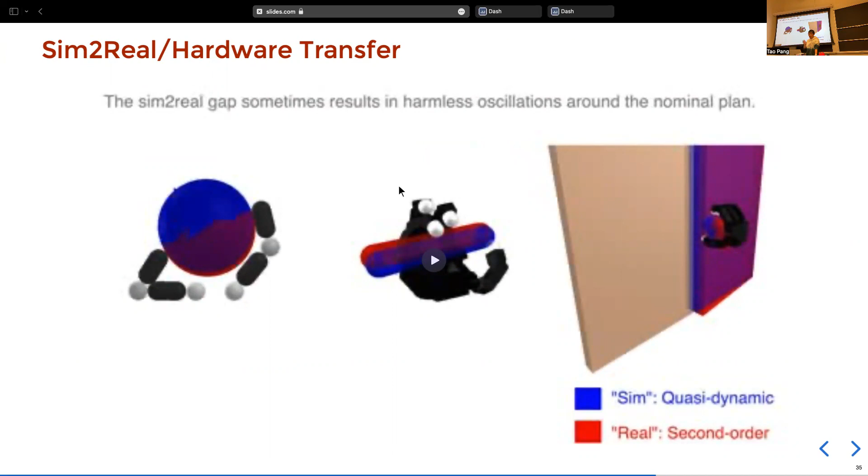But the consequence of having this discrepancy is not always disastrous. In cases where the quasi-static assumption is indeed satisfied — meaning if I'm not touching the box, it's not moving — this error between second order and quasi-static dynamics mostly causes harmless oscillations between the real trajectory and the plan.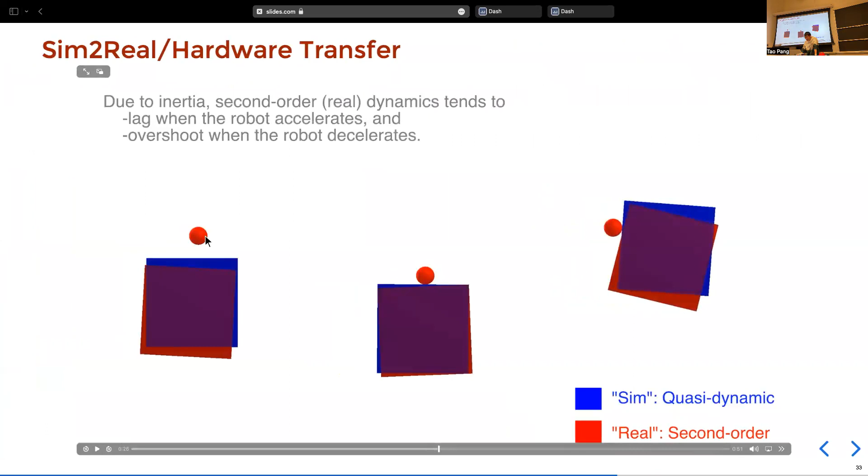This mostly causes harmless oscillations between the simulated trajectory and the actual trajectory, and that can be shown with one of these hardware examples. I think the box indeed stays in place when the robot isn't touching it, and therefore we can just open loop execute our plan and it works pretty well.

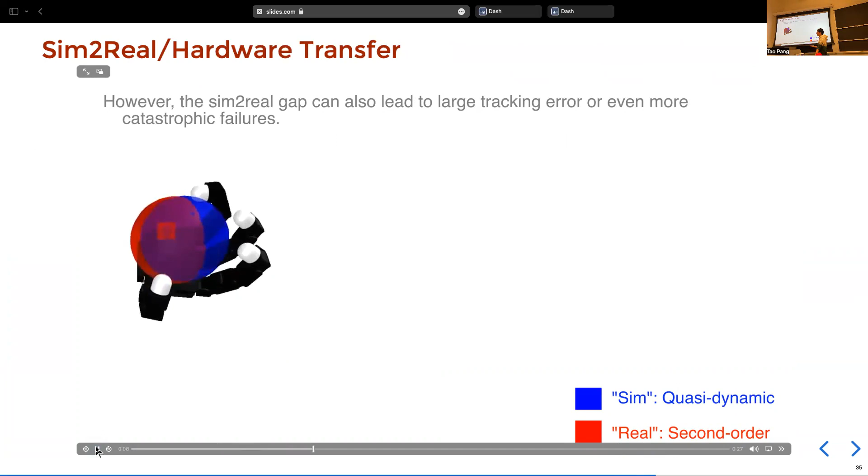But there are other cases where the object doesn't stop moving when the robot doesn't touch it. For example, this ball, if I'm holding it like this, it stands still in my hand. But if I put this on the table, it's going to roll by itself. And that is indeed a problem we see in simulation as well. So if there are no fingers to stop the ball from rolling, there can be fairly large tracking errors, or the ball can even just roll off the palm.

The hand can also drop the box. So, this motivates us to think more about both robust planning, where we have robot configurations that make sure the quasi-static assumption is always satisfied, and stabilization of this plan, where we use feedback to make sure this kind of thing doesn't happen.

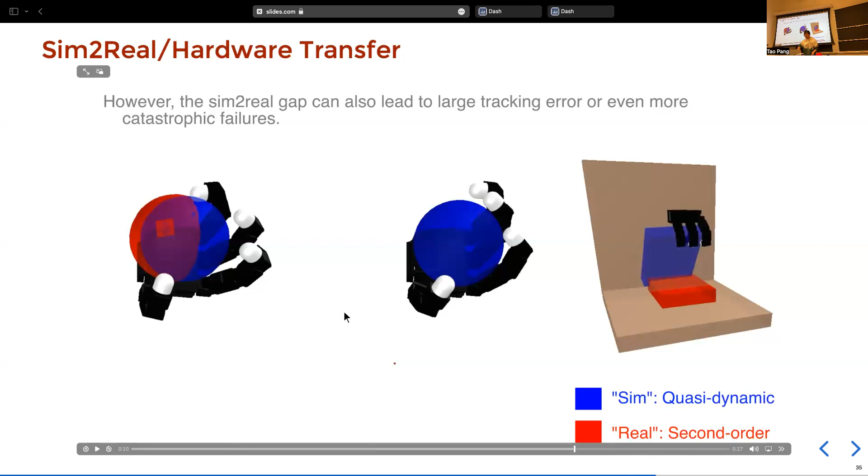So what's next for contact-rich planning, manipulation, control? I think for model-based planning for complex systems, there's a common theme of a hierarchy of models that starts at the lower resolution that looks further ahead, and then there are higher resolution models that tell you more detail.

This is the case for locomotion, where I think the low resolution model is the centroidal dynamics of flying potatoes - that's indeed what they call it. And when we need to think about the robot itself, we add in the full body kinematics in the higher resolution model. So in thermodynamics, we have these PV diagrams that are also described by the ideal gas law, which is also quasi-static.

But on the real system, especially the combustion process, it's definitely not quasi-static. So to make sure the combustion looks like what it shows up on the plot, engineers need to think very hard about how to spray the petrol inside the combustion chamber, how to ignite it, so that the heat - it's a lot of effort to make sure the dynamics of the true gas matches up with the quasi-static version on the simple plot.

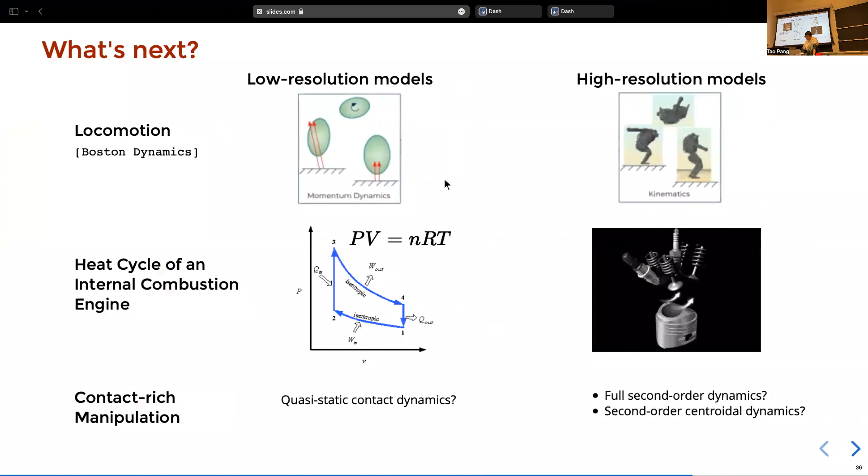One way I can think of right now to interface between the high and low resolution models is to use the solution we get from the low resolution model as an initial guess to a trajectory optimization problem, with the higher resolution model as constraints. There can be more creative and more efficient ways to do this, but that's something to look into.